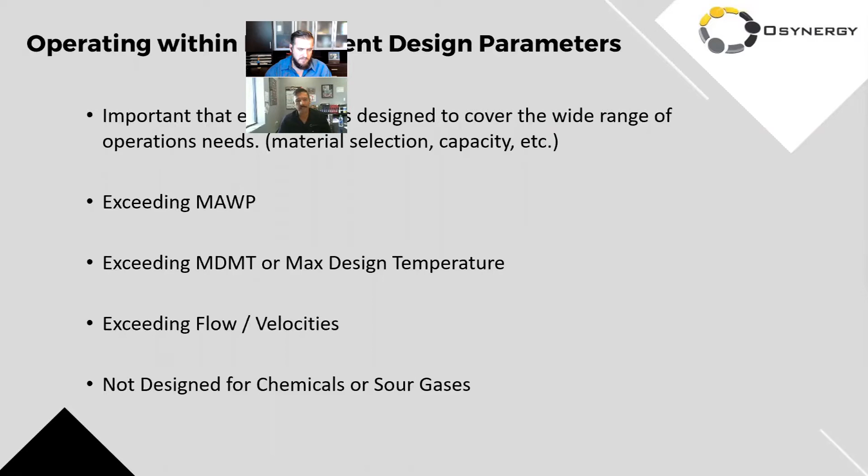Absolutely. And I like this next slide. You have a lot of good tips on here. So yeah, explain this to us.

So let's talk about overpressure. The potential impacts, of course, are anything from stress cracking to deformation to rupture, any asset loss, and of course you could get into human injury or loss and environmental exposure, right?

So some quick examples would be even as simple as hydro testing. We've heard of individuals, for example, if you're using a digital pressure gauge, just selecting the wrong units. Before you know it, this thing ain't going up, and boom, you overpressure. And then people say, hey, nothing happened, it just bulged, but you already overstressed the equipment, right?

Another might be a failure, right? A PSV doesn't operate and you overpressure it, or you have a fire and it just doesn't vent, it doesn't have full flow, so therefore you overpressure it. So that's one.

Exceeding minimum design metal temperature or maximum design metal temperature, again, you have a lot of the same losses, right? But you have potential brittle fracture, stress fracture, and of course you get into leaks, rupture, asset loss, and human injury or loss and environmental exposure.

Now, some of the things here are, let's say I'm in South Texas, right? So it's pretty warm down here, but imagine moving equipment that was designed just for this area, moving it up to Canada or North US, right? So all of a sudden we focus on pressure most of the time, we really don't look at the temperature. So imagine something that was designed for 22 degrees and you take it to -50, right? So that's where you'll have these potential issues.

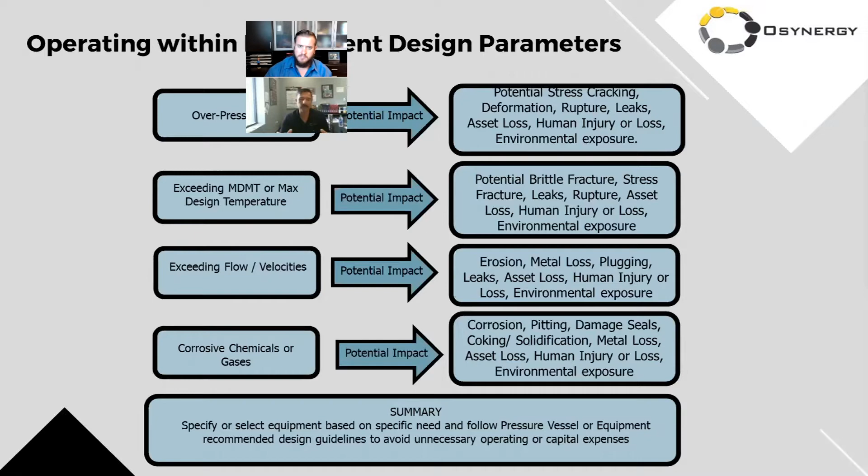And what are my risks in using it, and have I checked all my boxes off? So that will be one way to make sure you don't have any more operational costs than your initial by having some incident occur. Well, that kind of leads into the next one: asset integrity management.

We keep pressurizing, putting pressure on asset management, but actually adding the integrity side to it, that's another thing we're adding right now. By talking with you, we're adding into our asset management software the integrity of the equipment, doing routine inspection.

So I really like what you're doing here. If you can kind of go in depth of what you're talking about, equipment failures. Well, this is a pretty broad topic, right? We're trying to just capture a couple of key points here.

So when we talk about asset management, you have some potential contributors that are going to really create issues to your equipment. You have H2S, CO2, chemicals going in there. You have NORM from downhole. You have operating above design, whether it's pressure, temperature, or velocities, or just plain simple lack of cleaning and preparation before you store it.

This is kind of tailored a little bit to cover the broad range, right? You have production equipment that's really operating constantly, and then you have equipment that might be testing, or simply that you're not going to use and you're going to store. So all these are potential things we really need to consider before we just either move them around or store them without proper storage process.

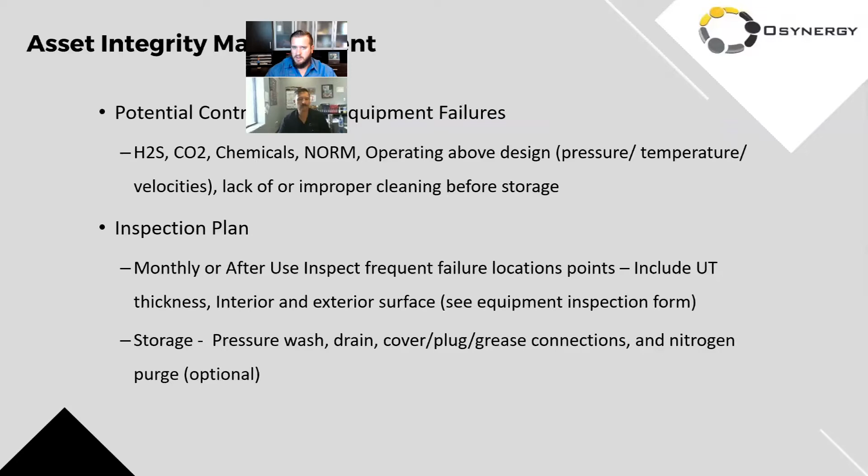Well, that'd be great. The equipment inspection form kind of goes into the next slide. On this one, you're really just kind of labeling out the areas that you look out for, or the vocabulary. Is that right?

Well, these are some of the key things—I mean, they're not all inclusive, but some of the key things, especially if you're operating: if it's a vertical unit, it's always going to be on the higher side or top side. If it's horizontal, it'll be on the shell side. But we've seen where, especially once you introduce some of the sour gases, those start creating pits along the highest point.

The other area we've seen it is where your liquid level sits, especially if you don't really do any maintenance to them, where you maybe drain it once a month and so forth.

We tend to see pitting along that liquid level section. We've seen it along nozzle necks, especially if liquid gets trapped in there and just sits for a long time, it starts eating up that bottom section. We've seen it especially on the bottom of the head.

We had one project where the customer said, hey, I have a little pinhole, we just need to repair it. But a pinhole is only a warning, right? There's something much bigger behind it. And sure enough, this was a pretty good sized vessel, I think about 60 plus diameter, and about 60% of the head was already corroded. A lot of metal loss. It was basically at a point where it's going to cause an exposure, right?

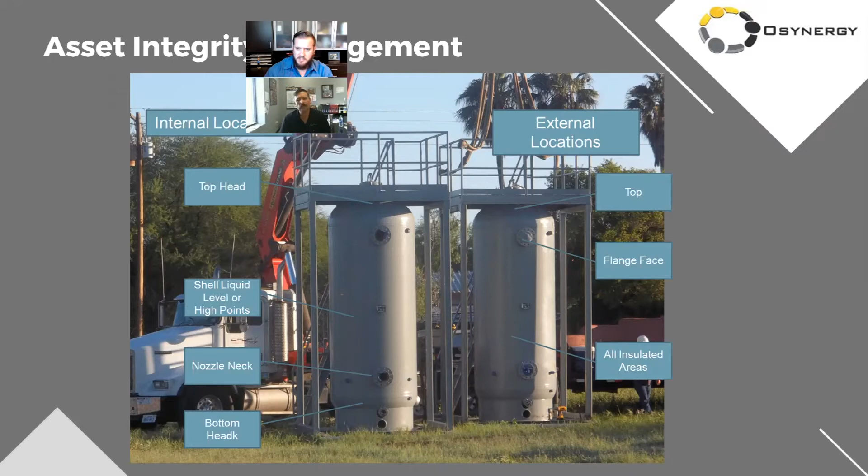And then your vessel's not good for the design pressure anymore. So that's why it's important for integrity management. So when y'all go in, this next one is your form. This is what, when you get equipment in or when you're doing field work, you document everything that's existing and what's going on.

If you notice, this form has a pre-inspection once we get it, and a post-inspection before it goes out, and I like it. I'm being biased, but I think anybody else could take advantage of it. If you have some engineering, just to evaluate what we have about that equipment, it has some quality control, and then it gets into the details of inspections. It even includes accessories. So for anybody like operators thinking of using this, it'll be great, because then they could add anything else they want to it.

Yeah, because it even goes into page 2. So now you've got piping and skid trailer, because what we're seeing right now is there's a lot of piping. It seems like the piping is the interconnection between the vessels. So anything rattling, especially from compressors, we're starting to see a lot of issues with the piping becoming brittle and breaking down. So this would be great for lease operators to go out there and do their own little check off list and observations. Like you said, the visual observations, you can kind of see a lot of what's going on just on the outside.

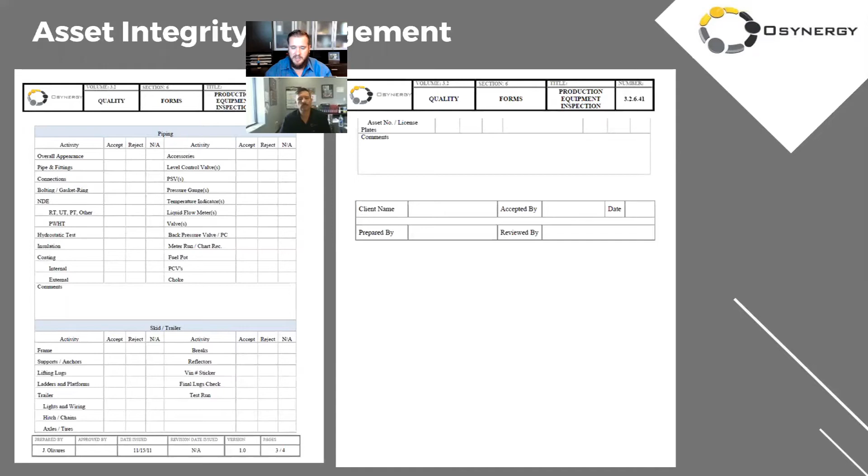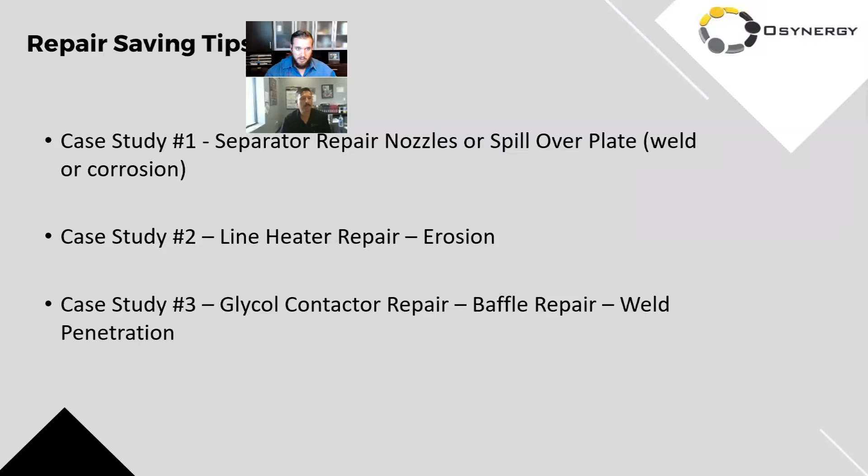Well, then going into repair saving tips. I really like these because everyone likes a case study of what to focus on. So you've got 3 case studies here. We'll kick off on the first one. So these are 3 case studies, but on your next one, these are the big areas that a lot of your clients have issues with, and the quick repairs, before buying something new.

So can you explain? So far we've discussed how to prevent stuff. The first 2 were obviously about how do we prevent getting to a repair. But if all that was done, or now we're at a point where we have to do a repair, then we've picked some of the top tips that we've used or look for when we're having a look at a repair, and how do we save money while still meeting all the code requirements. So this is about repair saving tips.

On a code versus non-code: a lot of times, especially in the oil field, we have a pressure vessel, but a lot of times we go to higher pressures and we say, no, but I want an API flange on. Well, ASME really doesn't consider or doesn't take into account any API materials. So that means you could basically replace that flange without having to go through the whole repair process with the AI. I still like to get my AI involved in all of this stuff, right?

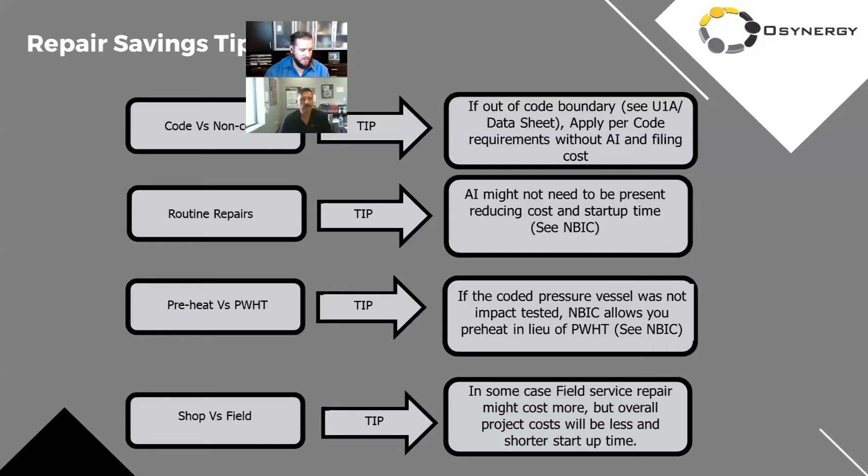That's awesome. Now I really like these tips, and you're going to reiterate with case studies - you still got 3 case studies. So the first one was the separator nozzle repair. This goes back into what you were talking about - let's go over to the first picture. Explain to us what's going on here.

So here's an example. What happened here was - this is from an inlet separator to a compressor. The problem here was the connecting piping was in a bind, basically put in a bind on this nozzle. So through the vibration and the binding, the moment caused it to start cracking.

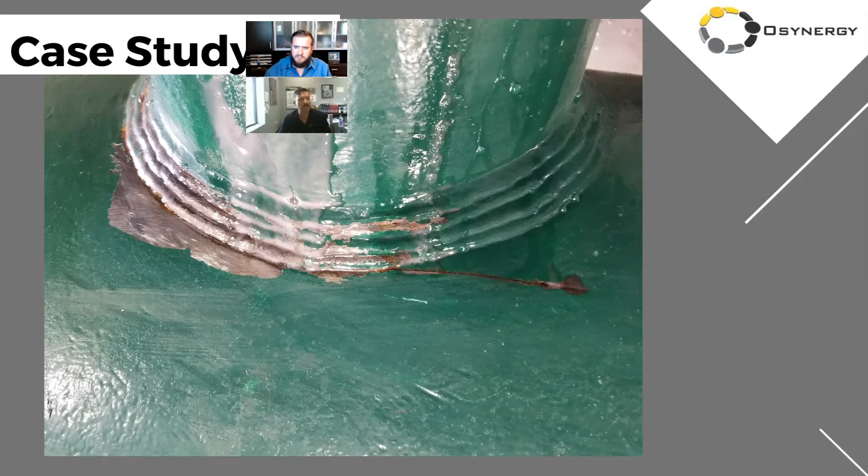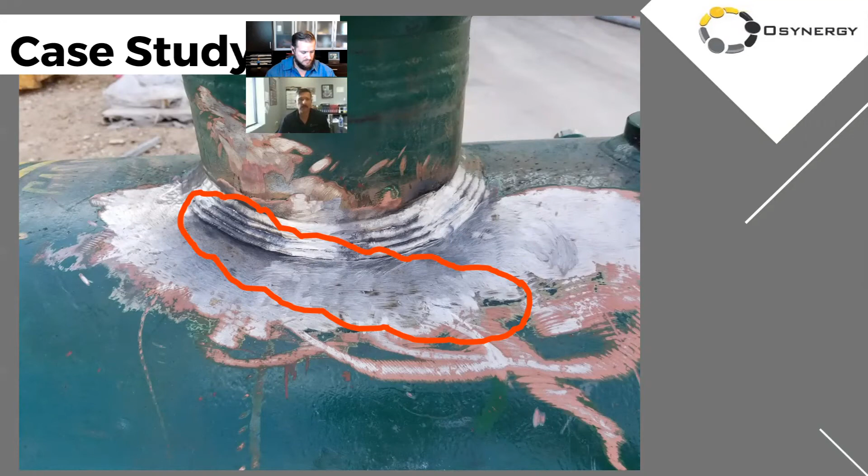If you click the next one, you'll see the whole extent of this repair - it really covers a pretty good area. What we did here was basically gouge it out, do PT, check everything, and then re-weld, inspecting internals for penetration, PT the outside, and then of course go through the process of hydro testing and so forth.

But what I liked about this particular project is we recommended a few things. One of the key things was, hey, it's to your best interest to remove the existing spool piece, refabricate it or adjust it so that there's no stress on the inlet nozzle.

I think we did this project probably 3 or 4 years ago. We hadn't heard back, so evidently whatever adjustments they made prevented this thing from needing another repair. The nice thing about this was planning, like anything, is the key. The more you plan up front, the more you save.

This was done in coordination with the compressor company to make sure it was either on a PM. I think this was done on a PM, so really there was no loss of production.

What was the turnaround on this project? Well, this one was done in the shop. We received it one afternoon, and by the next day we had already done all the coordination with the AI, since in this case the AI had to be present. The next day it was done, the AI was present, hydro tested — so basically 2 full days. Just proper planning.

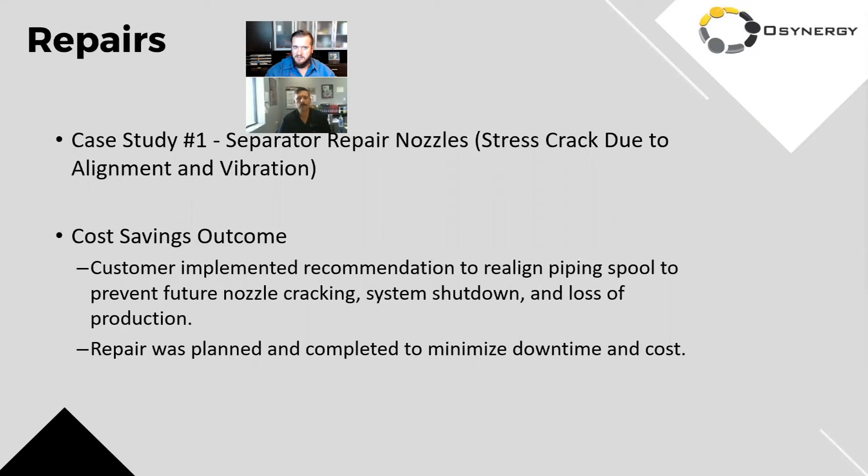Correct. So, case study — this is your line heater repair. This is metal loss due to erosion. Let me go to the picture. Explain to us what's going on here.

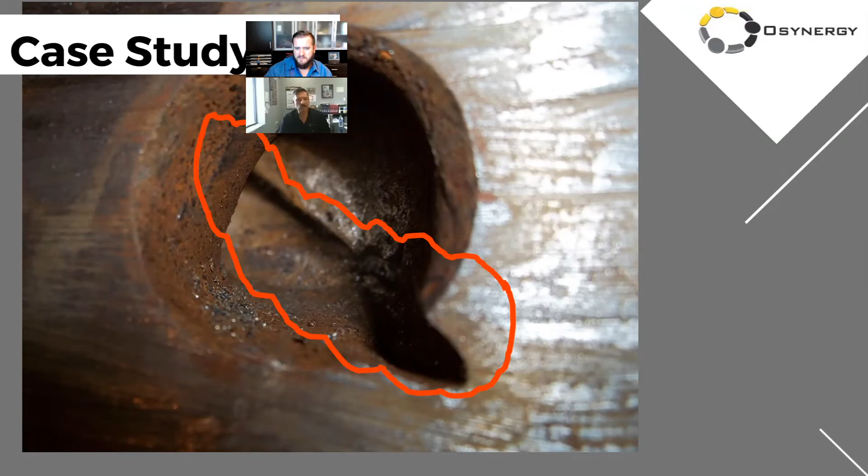This is a clear indication of erosion, a combination of more volume and sand. Every time I see this, it blows my mind how easy it is to cut through steel — something so strong — but with erosion, it's very easy to go through it. So what happened here is they had a lot more flow and they had sand, and it cut through the 180s in the line heater.

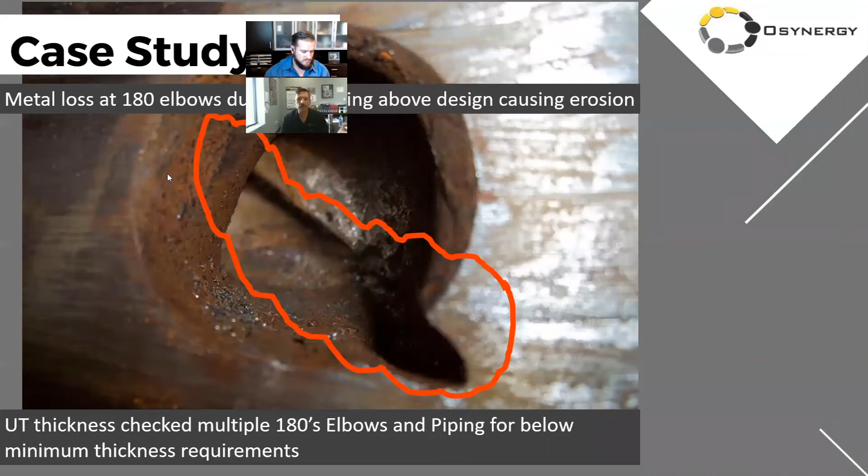One of the things we looked at is, if they already had a pinhole that was leaking, then the possibility that others — especially on the upstream side — also had metal loss was high. So we recommended, let us check them all. We did, and we ended up replacing at least 2 of the 180s.

That saved the customer time, because sooner or later, if we'd just done the repair they requested, it would have come back — the other one probably only had a quarter inch to a half inch left in it. So that one was going to come back and need a repair eventually. In this case, the communication and planning helped get this fixed the first time instead of sending it back for another repair.

What I liked about what you said is, you had a pinhole leak — your scope of work was just to fix that. But because you like partnerships and figuring out what's going on, you said, well if it's happening here, it's going to happen in these other areas too. You recommended to the client, since it's already in the shop and broken down, let's just replace all the areas of high concern to lower the risk of it coming back. And with that logic, they said yes, go ahead and do all of it. That's a good partnership.

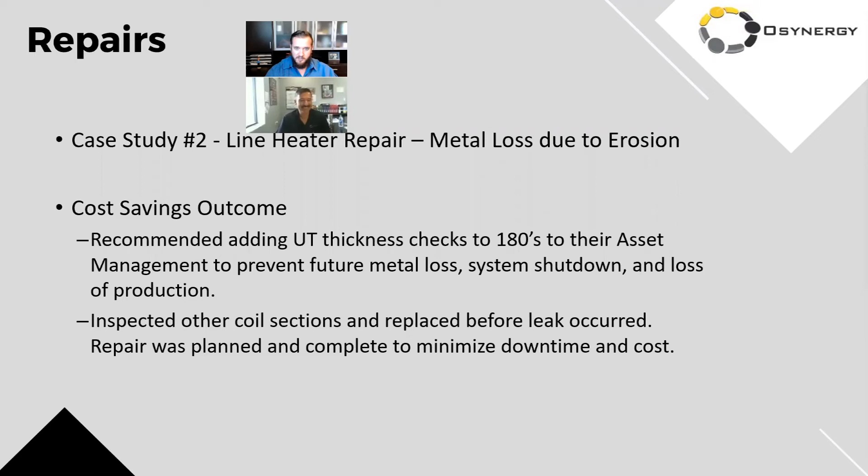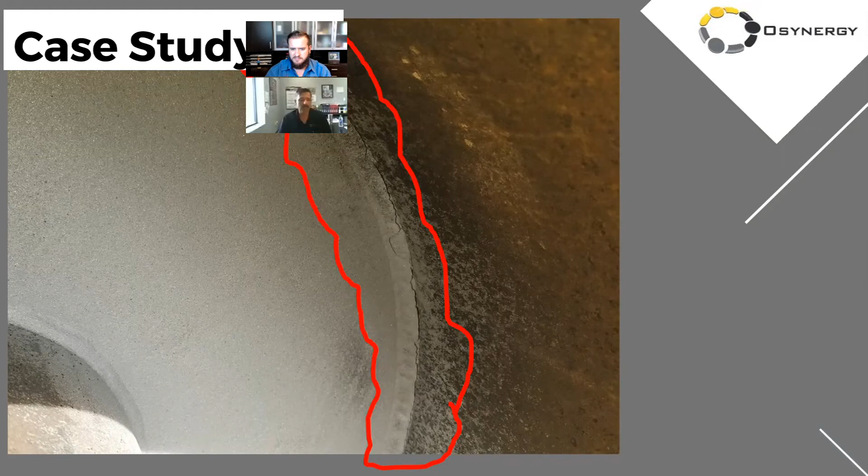Unlike any of the other repairs here, which all had to do with process — whether overdoing something or the flow — this one was actually manufacturing related. The weld just did not penetrate to the walls properly. So once liquid got behind the weld, it was just a matter of time before it leaked. What you're looking at is just a fillet weld — there was no full penetration. So once liquid got right behind it, it went right through the hat tray.

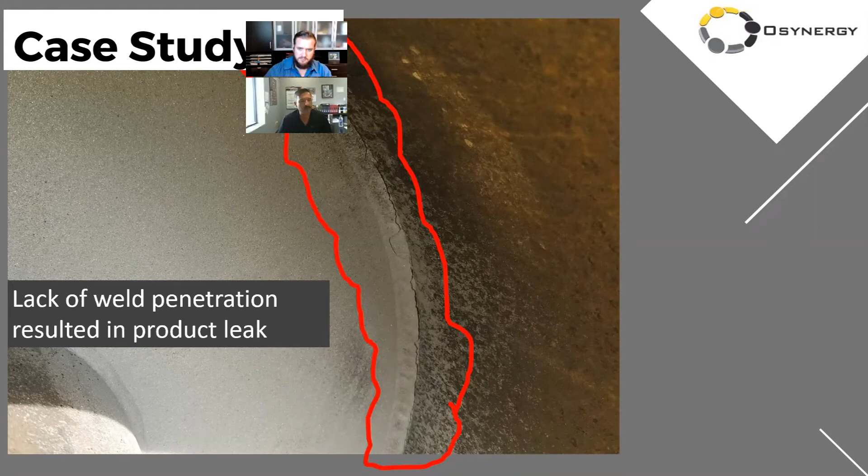So for this particular one, communication and planning is very essential. The customer said, hey, can we take the whole hat tray out? Because we want to also inspect other things in there, the mist pad and so forth, since we're not 100% sure. So what we did is we took it out and inspected all the other areas, and they were fine.

And when we put the hat tray back, we did a full penetration weld. If they would have done that at the beginning, they probably would have avoided this, to be honest, because it would have been real tough, unless of course the welding wasn't done properly. But we did a full penetration weld and added a little bit extra to make sure this hat tray would not have any issues in the future.

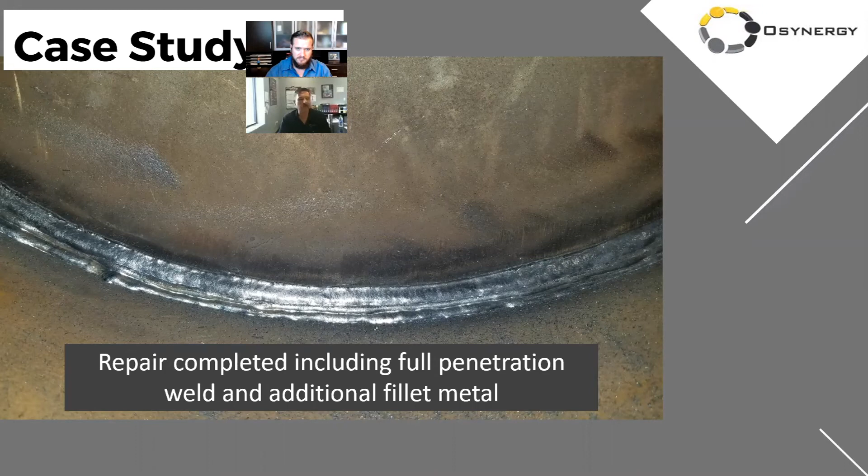Now this was a little complex too, because it was an existing contactor tower, so we needed to make sure that once we cut it and aligned it back together, you're talking about trying to be within 1/8 of tolerance, to make sure that when they put it back in service, they weren't going to have any issues installing the rest of the piping and connections.

So here we go, you're talking about cost savings. We talked about what we did, we inspected other components, and that saved them money from having to bring it back in the future. One of the key things here is all the savings really occur in the planning and the turnaround. I think this one was out within a week, only because it did have to go through the whole process of x-rays and inspecting other internal areas.

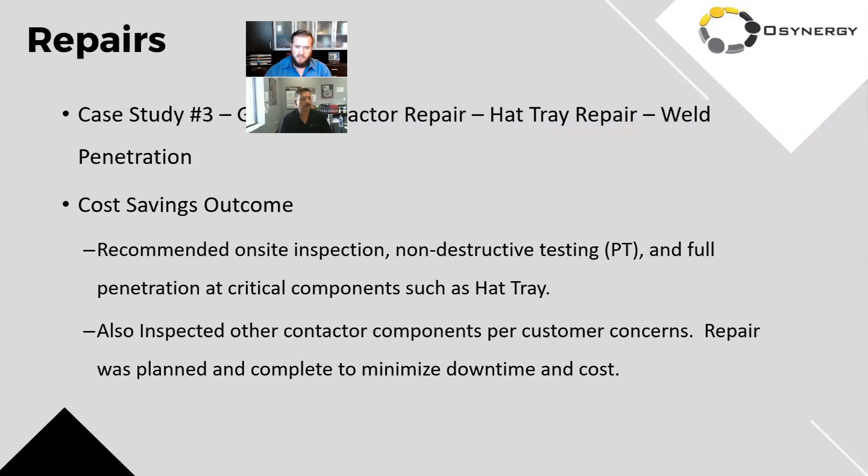That's good. Well, those are the case studies for that. Your next section was the repurpose, alterations, and re-rates. I'm glad you did this, because every time I talk to you, I get re-rates and repurpose backwards, so I'm glad you put the vocabulary here for us.

Yeah, go ahead and explain what you mean by alterations and re-rates. Well, so far we did the prevention, we did the repairs. Now we're saying, hey, I got this piece of equipment, can I do anything else with it? Instead of just saying this is a two-phase separator, that's all it's good for, no, we like to think outside the box, how can we reuse this or modify it, etc.

So when we talk about an alteration, it's basically modifying existing equipment to improve either efficiency, customer requirement, or adding additional process ports, etc.

When we talk about re-rates, it's basically changing an existing equipment condition, whether it's lowering the pressure. Sometimes it depends on how it was designed, you might be able to increase it a little bit. Sometimes it's maximizing the temperature. Ideally you'd like to design equipment to be maximized, but it's not always the case. So you could always look into it and see if you could do some re-rates, and that way you could take advantage of what you have.

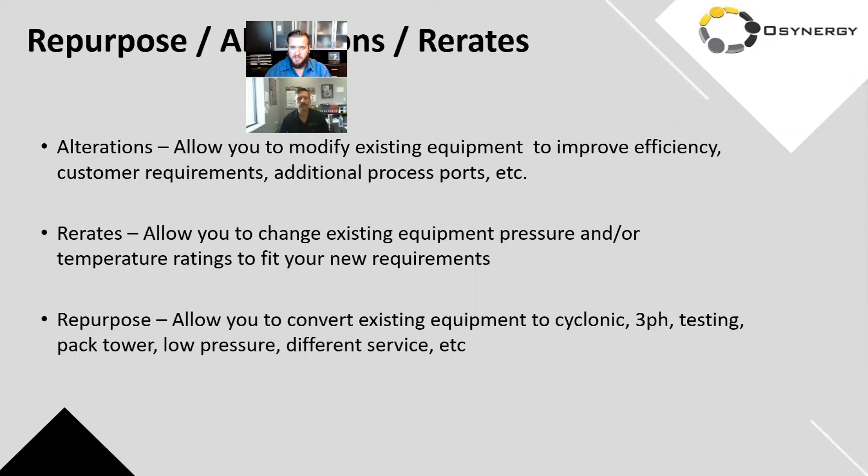Well, that's good, and everyone's trying to save money with what they have. So if you can just do an alteration, re-rate, or repurpose, and use what you have and only spend 20 to 30, 40 percent rather than buying new, I think everyone's going to be pushing on that. You have 3 case studies also explaining some examples of what you're talking about here, which is great because it's good affirmation.

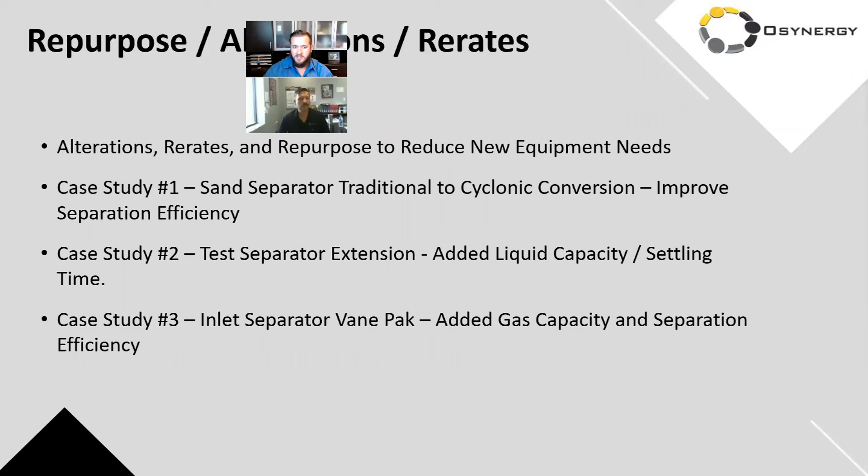So jumping into the first case study, let me go in. Repurpose and alteration - so it's a combination of 2 out of the 3, but it's a sand separator, traditional, and then you made it into cyclonic conversion. Mostly it's because improving separation efficiency.

So did this come from the client, or did you work with a client of saying, do you have something that we can just convert it for you?

Well, what happened in this particular one is the cyclonic version came into a pretty big demand over the past couple of years. Up until about 4 or 5 years ago, everything was what we call traditional sand traps. The cyclonic does give you a better separation - I think it goes even up to about 98%. A lot of it has to do with the operating side.

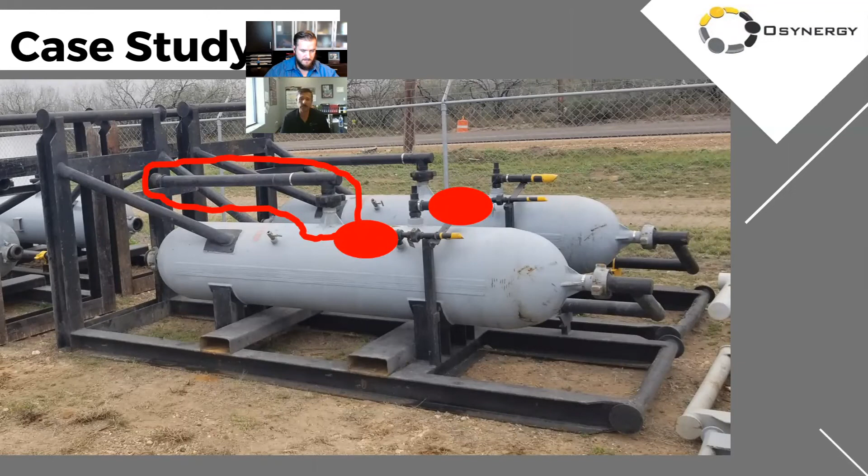But this was one of those that the customer said, hey, is there any way - I got these sand traps, I don't use them, I can't use them because they don't want traditional. Do we have any options? So this is one of those that we say, hey, we'll have to remove the head so we can see what you have internally, and then we could repurpose it, gut it out, because they had a couple of diverters and things like that inside.

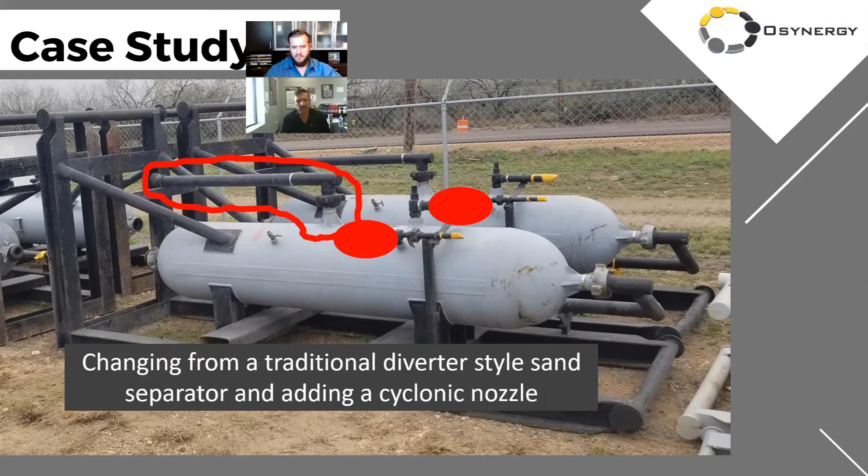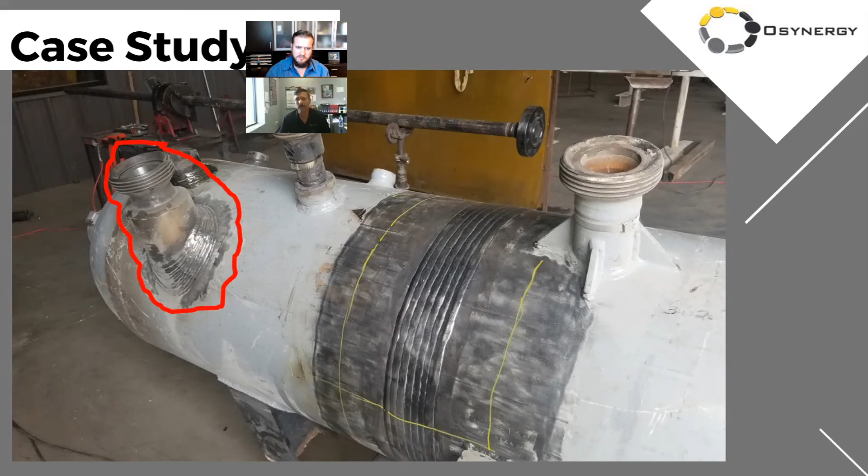We gutted it out and then applied our cyclonic inlet device to make it cyclonic, modified the nozzle, added a new nozzle, because the cyclonic are real tough - you have to get to the end to really make it a true cyclonic. There's other ways to design it, but basically it's at the very end, so it requires a lot more metal and so forth. Even the cutting is a lot tougher.

But what this did is obviously we repurposed a piece of equipment that the customer had, and their customer was basically requesting a cyclonic.

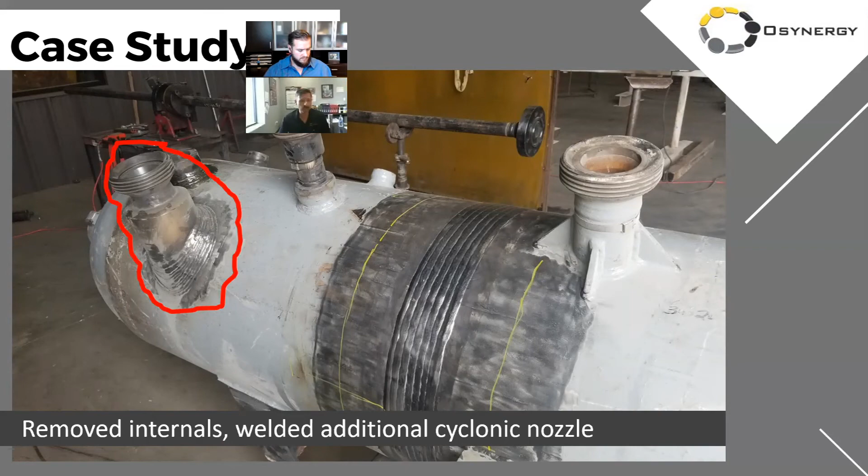So here we'll go into some of the benefits that we did here. Once we gutted everything out - this is the end of it - but basically you have a new vessel, or a new sand trap in this case.

So the benefit here was obviously 2 big things. One was cost - we probably saved them, or they saved, about 60% of the cost. And then at that time it was taking 6 weeks just to get materials in to build a new one, so at least they saved 6 weeks of time to where they could actually start producing money instead of waiting for something. They actually took something they had and we converted it into something that was producing revenue in a lot shorter time.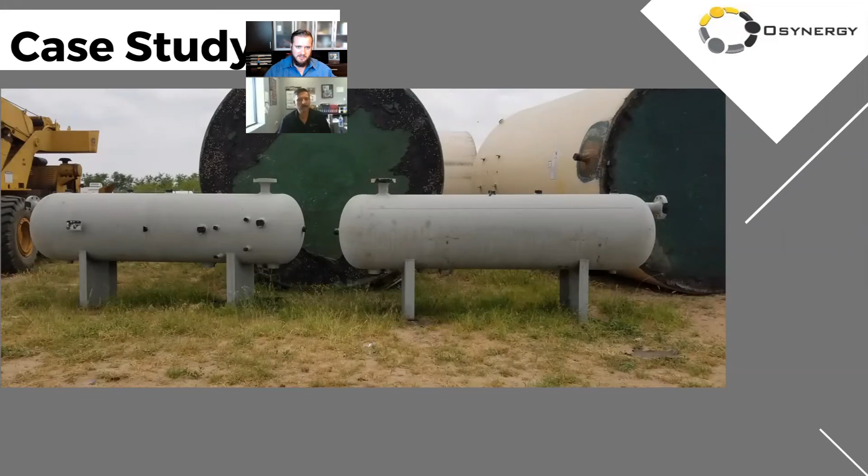That's correct, yeah, so this is what they had. Basically they had some production separators - I think these were really more test separators, they didn't have the mist pad and what have you inside. They were trying to evaluate what can I do with these, and they were looking at ordering a larger separator to meet the customer requirements, and then going through the process and understanding that they had these available.

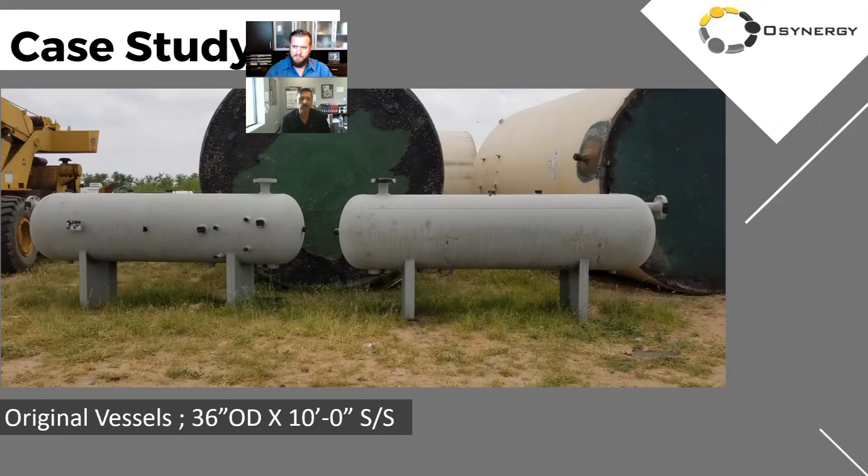We recommended the alternative of extending these in lieu of going to a larger vessel. Yeah, and that's what you did here - is that like added another 5 feet or so to that? That's exactly right. So basically, instead of 36 by 10, we converted it into a 36 by 15.

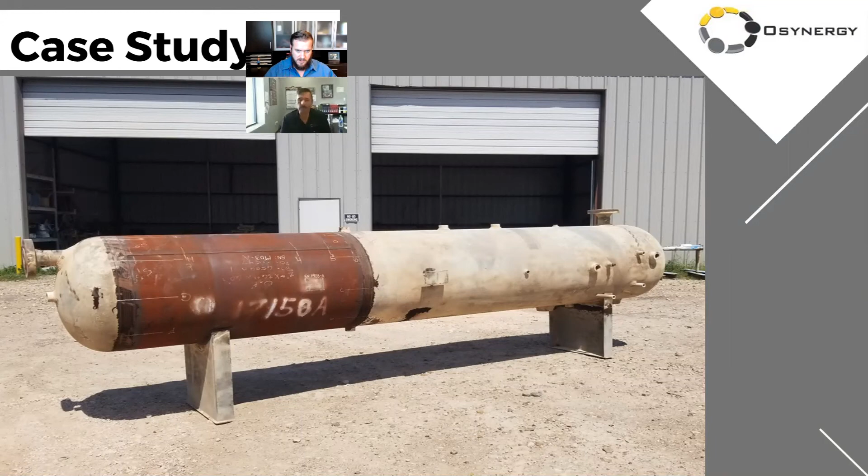That's awesome. So this one's even greater - we probably saved 75% of a new one in this case, and then the time, it was at least 6 weeks of saving.

So basically, by the time they brought it in, we were already preparing that separator. By the time we got the shell in, we were ready to put it together, with all the modifications that we did, plus some improvement internally to it as well.

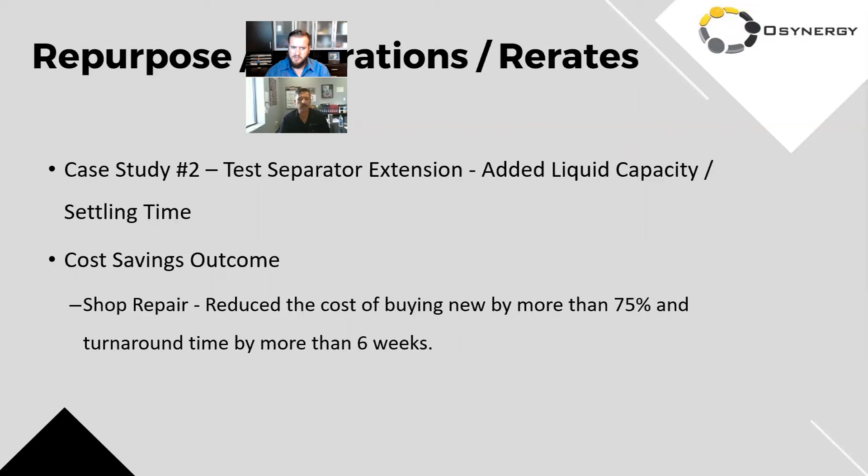So overall, especially in today's time where we're trying to save money on anything we have to do, these are things that you really would want to look at as repurposing some of your equipment. Absolutely.

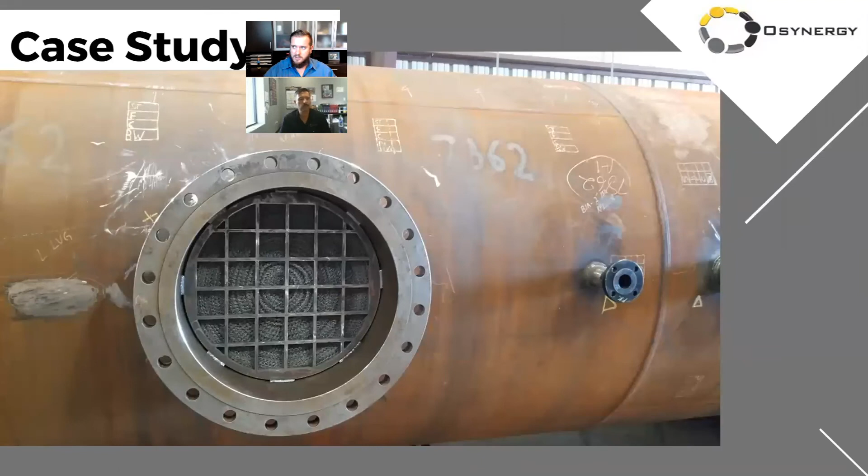And your case study number 3 was mostly focusing on alteration - inlet separator vane pack, added gas capacity, and separation efficiency. So let me go to the picture right quick. Explain to us what's going on. Sure, unlike the first two.

The first two were done in the shop. This particular one was actually done in the field. What you're seeing here is more of a shop picture. But basically, this was a standard design. They had a mist pad based on their flowing conditions and their gas requirements.

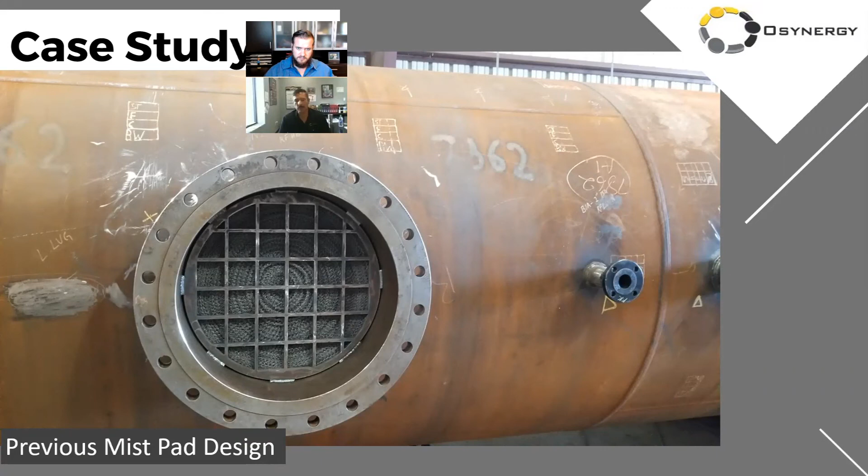And then down the road, what happened is they started increasing the required capacity. So instead of trying to modify and do a new vessel and all that kind of stuff, what we did is we added a vane pack to allow them to have that required separation of mist. And therefore, this was done in the field.

So one of the key things to do anything in the field, especially when you're driving from South Texas to, let's say, Midland or any other places, is preparation. So we already had everything cut out, all the materials were here. It was prefab. So by the time we went to the field to do the job, it took us probably longer to get there and come back than it did to do the job. I think in one day we already had it installed, and it was up and running basically. That's awesome.

So the field repair saved 80% on this one because of reduced transportation. Oh, because you did it in the field. So this is one of those - it was a larger unit, 72 inch by 20, and it was already piped up, skid mounted basically. So this was easily around 80% by the time you consider having to load it and transport it, and it was a wide load. So all those things come into effect. It's just, really, considering doing something in the field plays a big role.

Of course, there's other factors, whether you want to look at safety hazards, you have to outweigh your risk basically. But on this one, even the turnaround - by the time they would have loaded and brought it over, we would have lost at least 2 weeks. So this is one of those key things that you could easily implement in the field and be up and running a lot quicker, and therefore your production is not shut down.